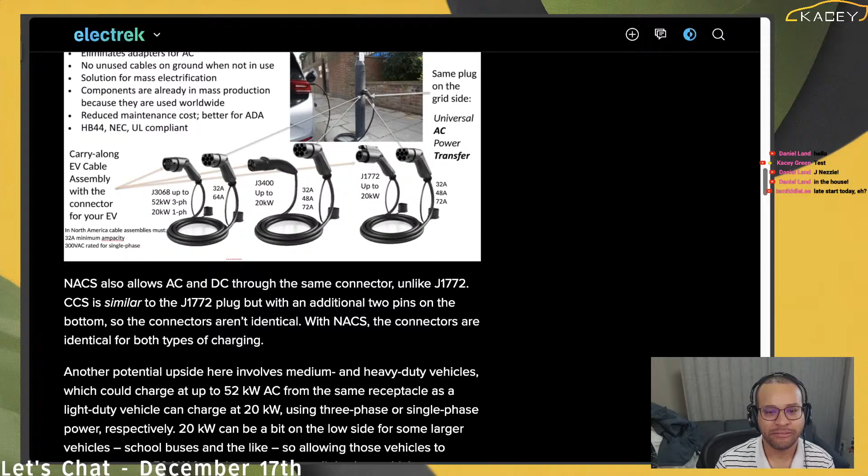All right, so AC and DC on the same connector. That's not new to those of us with Tesla, and I discussed that earlier. Similar to say J1772 with additional two pins that CCS are talking about. Another upside is in medium and heavy duty vehicles, they can charge at 52 instead of just 20.

Finally, these boons add together to a world where it's easier to install and maintain chargers and easier for everyone to use those chargers wherever they're parked, which means more cars plugged in at any given time. I guess what they're saying there is if a parking lot is full of lamppost chargers, that helps you out with vehicle to grid, it just allows more people to be plugged in and an opportunity for charging.

Some of the comments there were, oh, they're just going to reduce the output. Maybe we'll see.

The narrative this author was going for was that the new detachable plugs option allows people who don't have off street regular parking, like at an office or a house or townhouse, to get their charging done. And then the increased voltage allowance and the detachable cables will allow folks in condos and apartment complexes to feel more comfortable about installations because now instead of having to get a transformer to step their commercial power down to something that fits J1772, it's not hard.

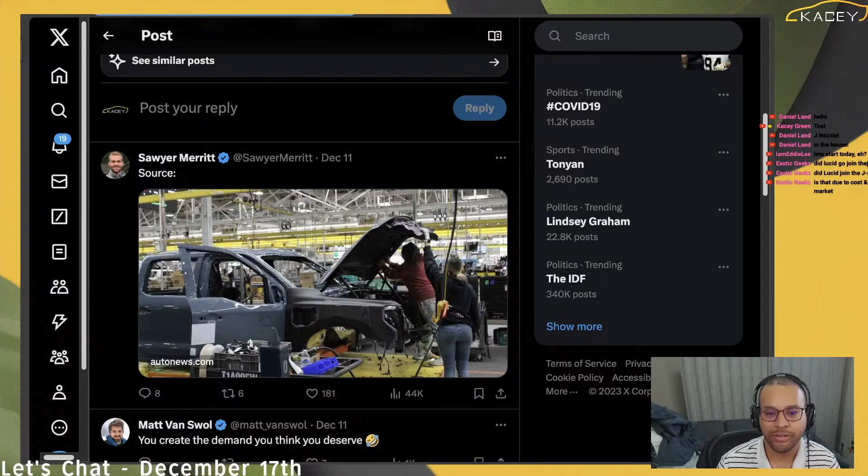Ford told their suppliers to prepare for an average volume of around 1,600 Lightnings a week, down from 3,200 a week today. Hate to see it happen, it's a solid truck. At the same time, slowing it down will also allow them to easily change out the architecture behind the port. But I wonder if that might mean the new truck is going to be ready sooner than we expect. That's pure speculation on my part.

Oh boy, all right, now we're going to have the Debbie Downer section. We're going to talk about IF Metal versus Tesla. That's the Swedish union, the Swedish Mechanics Union. And they have in the past claimed that all 130 mechanics in Tesla Sweden are on strike with them.

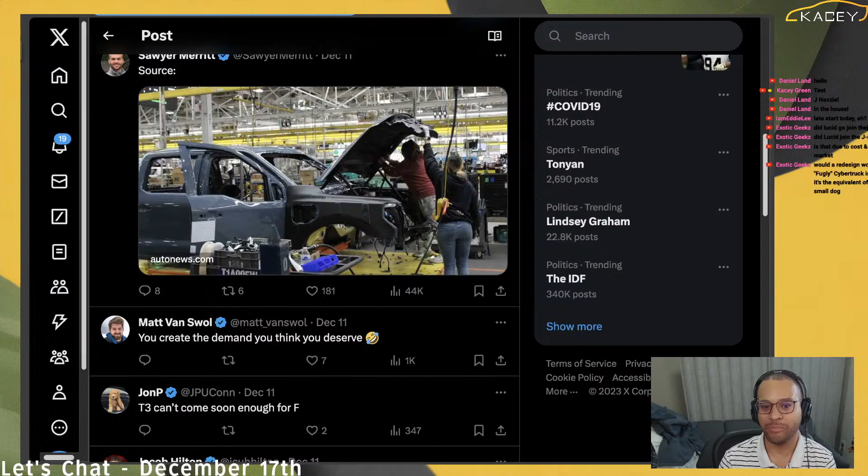And we've seen, by their own admission of the mechanics, that is not the case. So let's see what's going on this week over there in Sweden.

First up, they tried to get a sympathy strike out of the German union, IG Metal. They have almost the same name, it's a G instead of an F. So IG Metal said, you strike for your own business, you strike for your own wages. A political strike would mean violating the duty to work. So basically, they feel IF Metal can go deal with their own problems, and we will deal with our people, and we're not getting sucked into this mess.

So it seems that IG Metal has seen what is really happening, and they don't want to bring their people down with this. As we saw last week, there were 20 people at the hydroforming plant that stand to completely lose their jobs, and IF Metal approved for them to get laid off when the company went to them and said, 'Hey, we don't have anything for these people to do. Your business with Tesla has now, since these people won't do the Tesla orders, we have nothing for these people to do.'

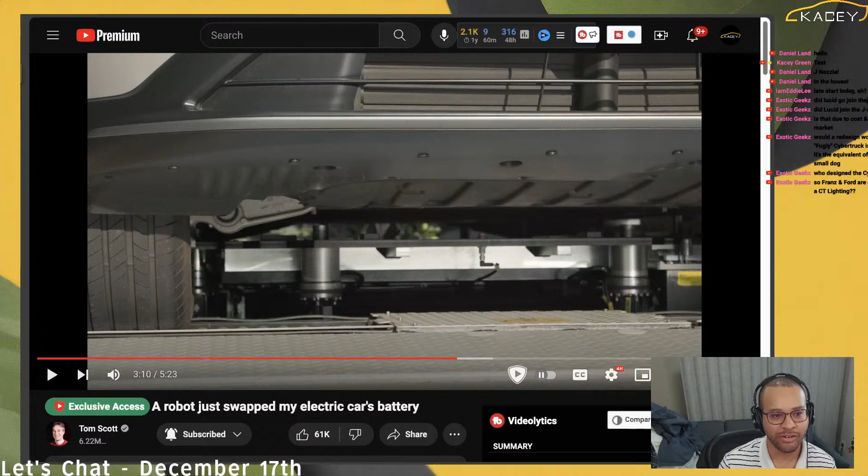Now we're going to talk about Mazda again. I don't know why we talk about Mazda so much when we are talking about EVs and green cars. I guess they just keep inserting themselves into the conversation.

Mazda will slow electrification even more than initially planned. It hopes to debut 7 to 8 new EV models by 2030. Do you think this will be enough for Mazda to be competitive in the EV space? No. If they want to be an also-ran, then yeah. If Mazda doesn't change anything, I see Mazda going out of business.

We already saw that they canceled the one EV that they sell in the States, the 100-mile range vehicle. Yes, 100 miles is enough for your daily commute, but then you have to be able to afford a $30,000 to $40,000 commuter car, an extra car that doesn't do what you need for everything else.

I'm a big person to say that you don't need a car that does everything, but you do need a car that gets you through a big chunk of the year. You don't need a pickup truck for the one load of gravel you move a year for your garden. But if you do that every month, it might be worth looking at a pickup truck. If you do that every week, it might not be a bad idea to have the electric pickup truck. You can decide what you really need, but if you only do it once a year, it's $19.99 to rent a pickup truck for a day or an hour.

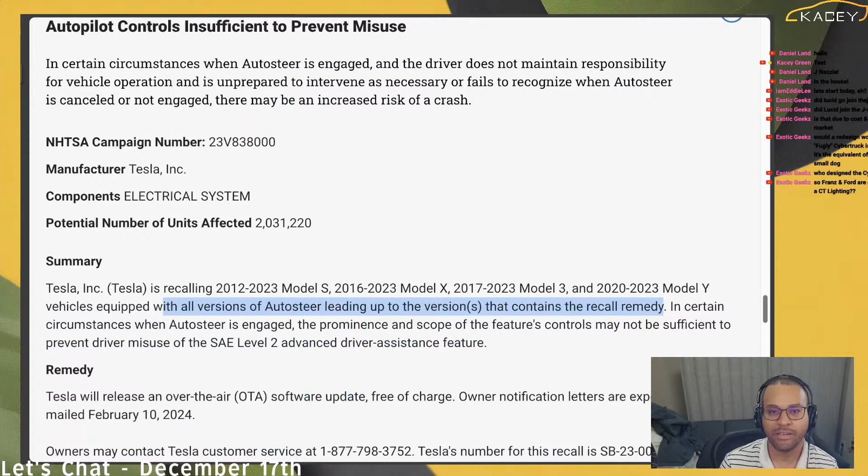All versions of AutoSteer leading up to the versions that contain the recall remedy. In certain circumstances, when autosteer is engaged, the prominence and scope of the feature's controls may not be sufficient to prevent driver misuse of the SAE Level 2 Advanced Driver Assistance feature. What does that mean? Some people are going to do stuff like use weights on the steering wheel, or all the stuff Consumer Reports showed on how to defeat the safety systems. So here's the remedy: Tesla will release an over-the-air software update free of charge. Owner notification letters are expected to be mailed in February 2024.

Owners may contact Tesla service here. The Tesla number for the recall is Sierra Bravo 2300008. Owners may contact the NHTSA safety hotline at 888-327-4236. That goes into the affected products, which is all of them.

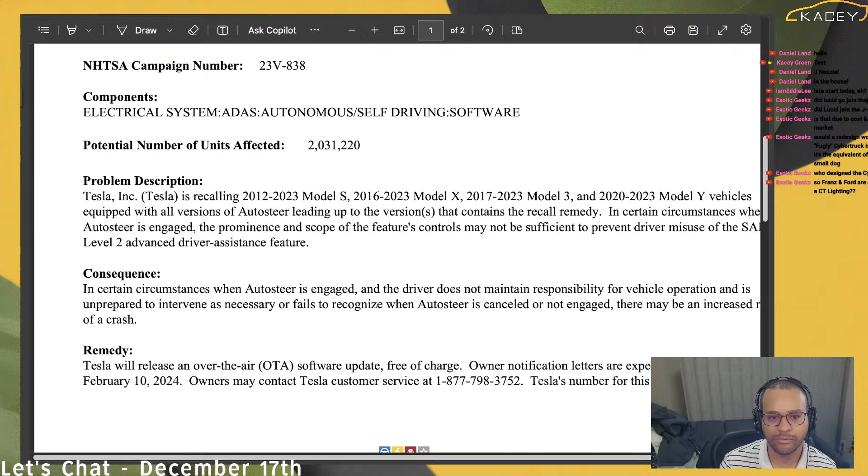Then it goes into the associated documents. There's a PDF there. I thought these were interesting because there's a bit of discrepancy even in this. Every car has a campaign number, potential units affected, the remedy, the notes. So that's the letter to the government. Let's go close this.

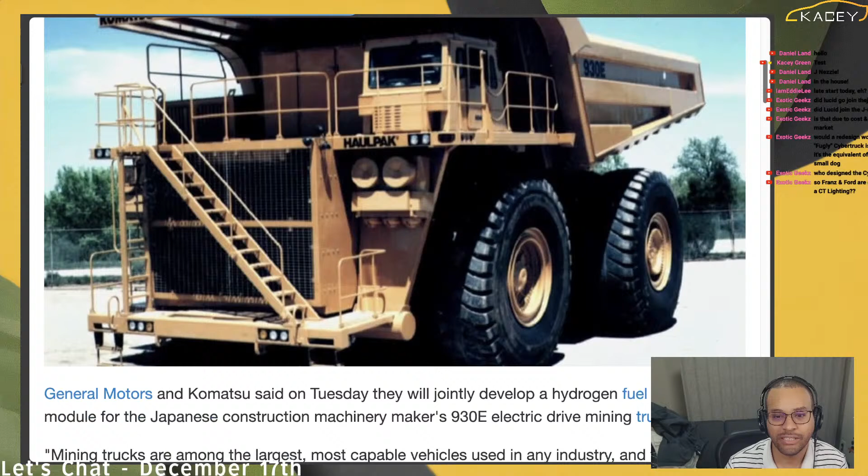It still doesn't work out for road vehicles. Where did I say that? Did I call it out? I might have called it out in the comments... nope, I didn't call it out in the comments on this one. Basically what I was getting at was, except for in cases where the math works out, you've got vehicles like airplanes and ships.

And the ships, I don't think most of them will need it either, because we've got kites. They attach to a hard point on the ship; some are automated, some are not. These kites can add to the propulsion of the ship. And then we've got rigid sails that can be deployed from deployable masts, like an airplane wing, rather than fabric sails, and those can be more compatible with container ships, oil rigs, and that sort of thing. So the need for hydrogen on a ship is lessened when you can just use wind and solar. Oil tankers especially can use solar because you're not going to be stacking containers on top of them.

So that was all I had to do with hydrogen. I'm done with them.

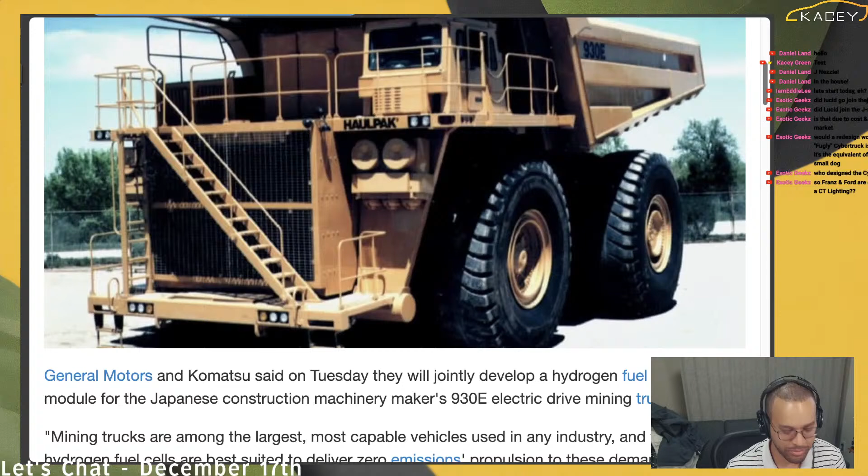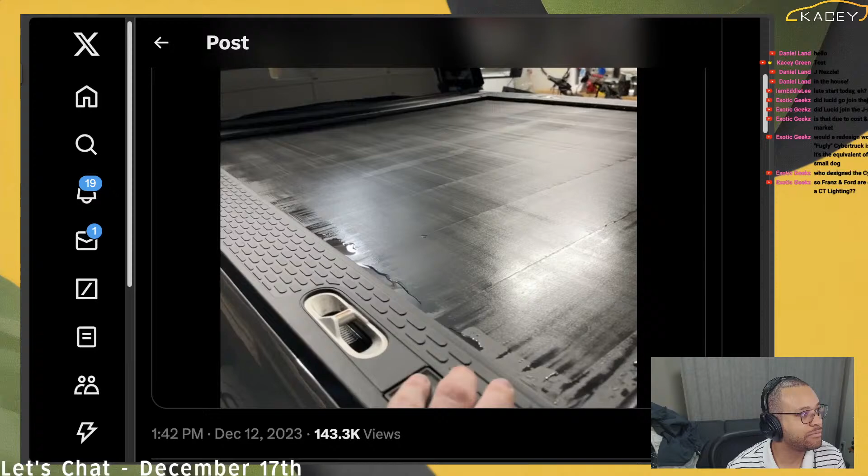Moving on, now that Rivian's finally got that fixed, if you've been waiting, there you go. I guess now, once they get the retrofits done, they should probably start offering the feature again - the tonneau cover they've been offering.

Tesla Giga Shanghai hits a new production record in November. From January to November, they sold 8.3 million NEVs - new energy vehicles - up 36.7% from a year ago.

I don't care about all of China, I want to tell you about the record. Giga Shanghai sold 82,432 Model 3s and Ys in November. That was down 18% from a year ago when it sold more than 100,000 units for the first time, but more than in September and October this year.

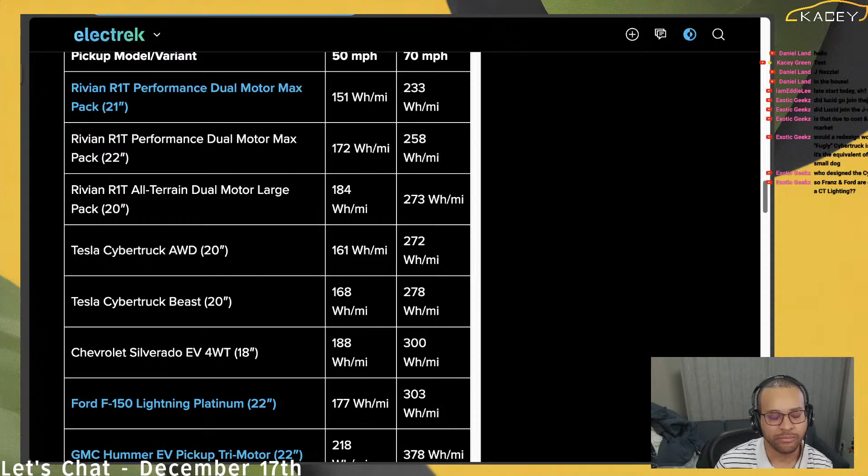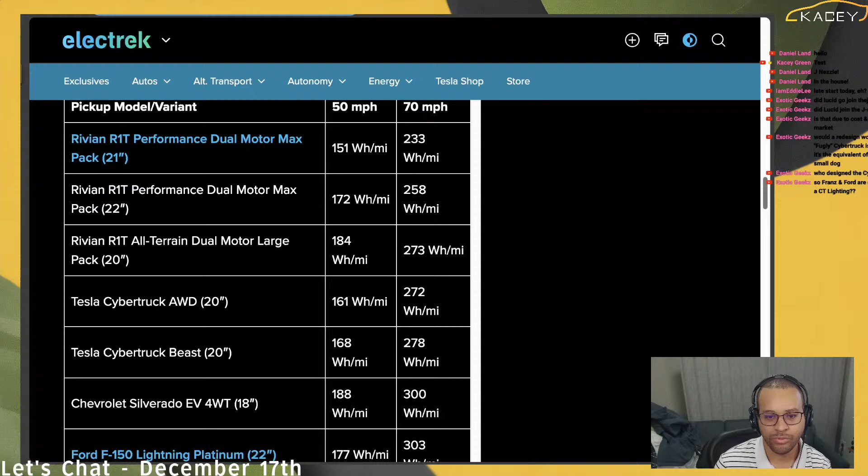And then we've got a little bit of EPA data that says the Rivians are more efficient than Cybertrucks, according to Electrek. They did a little face-off in a chart, so let's go look at their chart real quick. They're saying at 50 and 70 miles per hour, some of the Rivians are more efficient than some of the Cybertrucks. Why did I phrase it that way? Because it depends on which ones you're comparing. They kind of fight about it. And then you've got the Ford Lightning, Chevy Silverado, and the Hummer EV. So take that for what you will.

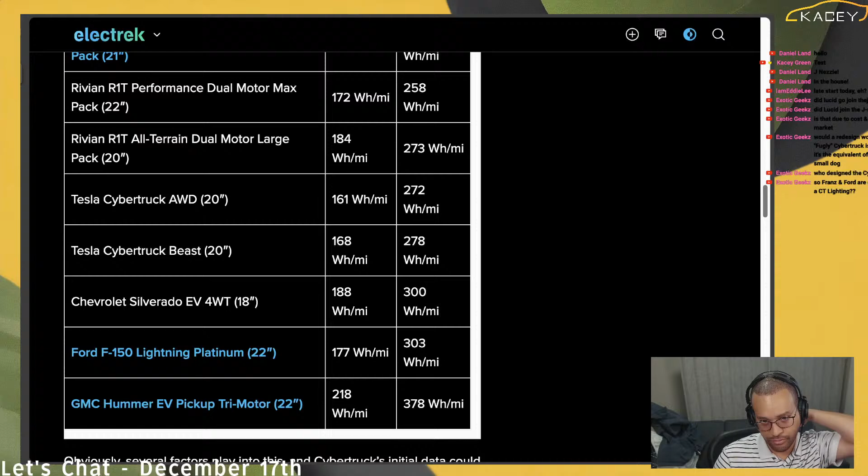So these ones, I don't normally cover all of the ups and downs of what Tesla's up to with their pricing, but as we approach the end of the year, that becomes more important. Starting today, Cybertruck reservation holders will have to pay a $1,000 early access deposit to convert existing reservations into orders. It'll be credited to your final purchase price upon delivery. For those of you who have purchased Teslas long ago, like me, this isn't new — the amount is new, and what they call it is new. But when it came to purchasing my Model X, they had a $5,000 order fee, which once you picked up your car, was credited into the money received. And when I was first trying to save up for a Model S, when they canceled the Model S40 on me the day before I was ready for it, I think it was like a $10,000 or $15,000 order fee you had to have ready to go.

Dan says, again, that's way more mileage than a bus needs on average. Well, the 140-mile range could last up to 4 days, probably.

Yes, Dan, but there are other Mega Beast, Ultra Beast, whatever they call it, the one with 300 and some odd mile range. That one will be necessary for some of the field trips that are available, because that gives you 150 miles out and 150 miles back. Now, you won't need all of your buses to have that by any means, but...

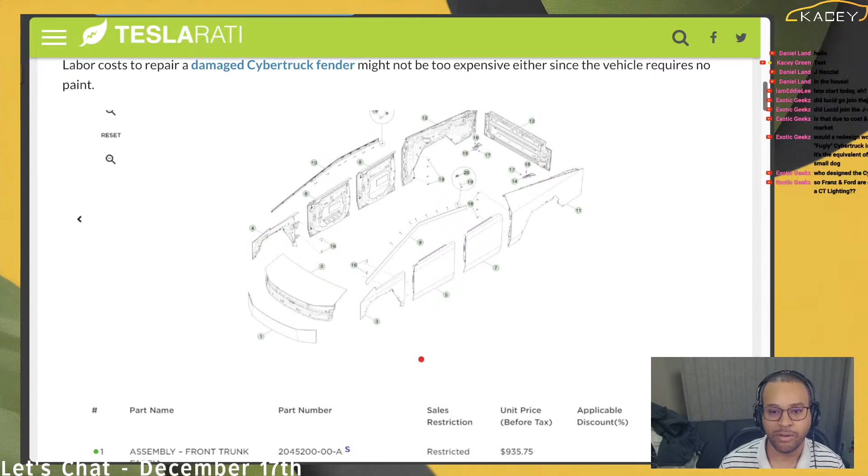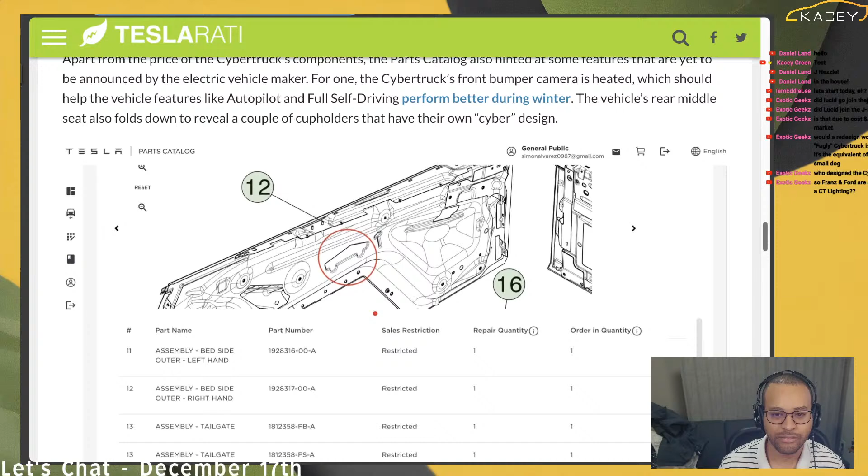Cybertruck parts catalog is now available. That's what I was talking about with the guy regarding the window - I didn't have the part number, but now I do. The parts catalog teases component costs, key features, and Easter eggs. You can get body panels, windows, glass, and the steering rack. There are little Tesla truck logos hidden in there, like the Jeeps. We also found the air line for the battery, so we know it's pressurized with air from the suspension system.

We knew about this, but now we've got a first customer listed for this program. The Rivian electric delivery van now has its first public customer: AT&T. They're going to buy the first vans outside of Amazon. We don't know much about this yet.

Speaking of companies saving their way into not dying but still making things worse by not making the right investments - GM has delayed the Toledo EV drive unit production plant until Q4 of 2024, nine months later than originally planned. I don't really care to hear their excuses, so we're going to move on.

GM's Cruise is not doing well. After they ran over and dragged a pedestrian who had been hit by another car, they basically shut everything down. They had an executive shakeup last week, and after that, they're now laying off 900 employees, over 24% of their workforce. Reading the memo: the layoffs hit mostly commercial operations and relate to corporate functions, coming one day after the robotaxi subsidiary dismissed nine key leaders. The moves are fallout from the company's response to the October 2nd incident, in which a pedestrian was dragged 20 feet by a Cruise self-driving car after being hit by another vehicle.

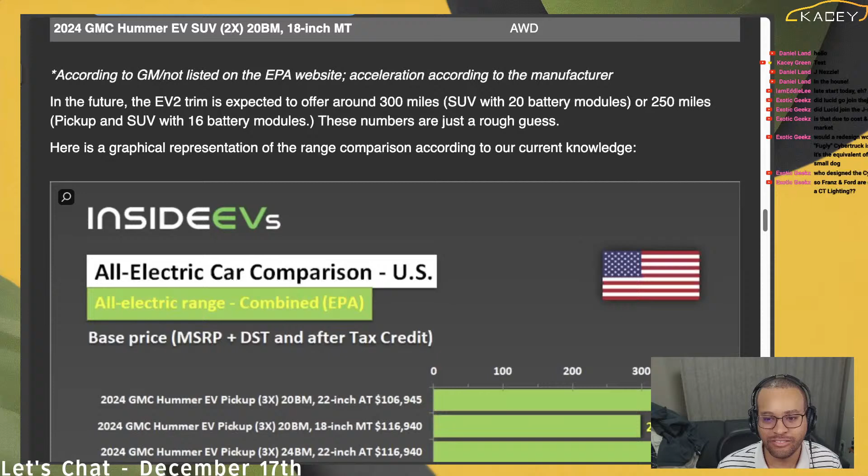The EV2X model is available only with a 20 module battery and starts at $96,550. So that's $8,100 less, but you still don't qualify for the tax credit because it costs more than $80,000 base. So here's the table. The cheapest one I see is $96,550. Wow, there's no tax credit, so the effective price just adds the destination charge to it. Nice. But if you want to just have a Hummer EV to show off, I guess, or if you like crab walk or whatever, it's become a little more reachable now.

Check on this multi-stream thing. So far, so good. All right, well, let me push the button now. No, it won't let me push the button now because it has to be 5 before I can push it.

All right, so this one, I've got a trigger warning for you. The trigger warning I wrote: mangled car from crash, 100% survival.

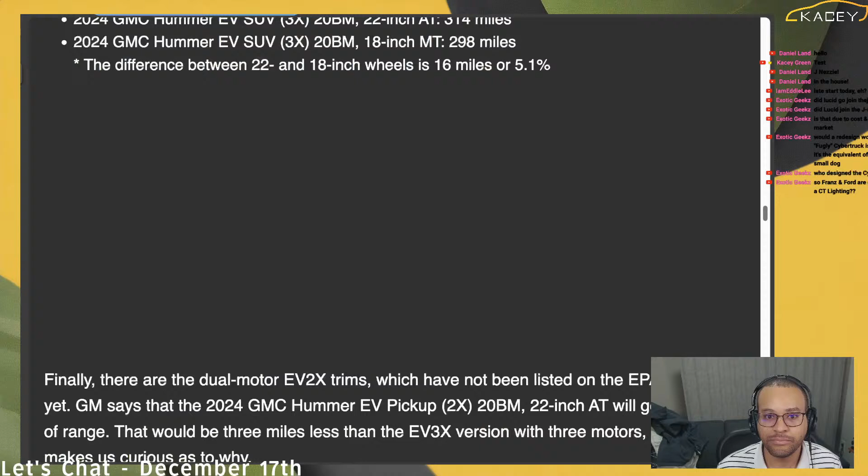This was a Tesla Model Y. Drive Tesla says, unbelievable that the Tesla driver survived this collision. Yet another example that Teslas are engineered to be the safest cars on the road. The Cybertruck will be no exception. P.S. Do not drink and drive. At Elon Musk, at Lars Moravi. This was a Tesla Model Y, and I'll tell you a bit of the backstory in just a moment. Soak that in for a minute.

All right, so the OPP Highway Safety Division says: driver of car in hospital, arrested for impaired driving. Northbound Highway 400, Bass Pro Mills, closed for investigation. The car was involved in a single vehicle collision with a concrete wall prior to stopping in a live lane and being struck by a transport truck just after 5 a.m. And then the person who actually wrote the post put their initials.